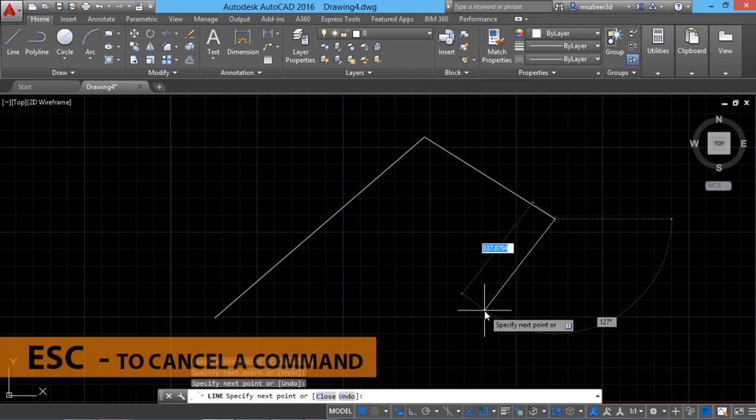Next, I would like to construct a circle. But this time, I'm not going to use the ribbon to choose the circle command, but instead, I'll type the first letter of the circle command, that is C. In AutoCAD, each and every command has got abbreviations, which we can memorize and input those abbreviations. So I'll type the letter C. When I type C, AutoCAD will list all the commands that start with the letter C. I can either give an enter to execute the circle command, or else I can choose any other command which starts with the letter C by picking against that command.

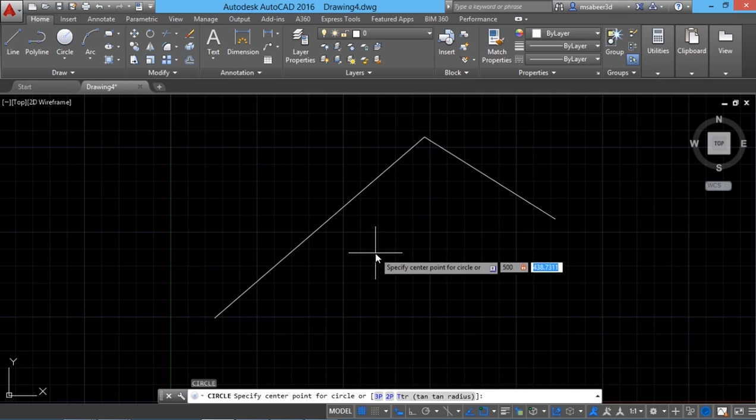So I'll give enter. It'll ask me for the center point, which is called the default prompt. So I'll just give a value which is say 500, 500. You can see that appearing at the cursor location, and press tab and again type 500 and give an enter. So the center is defined here at that coordinate location.

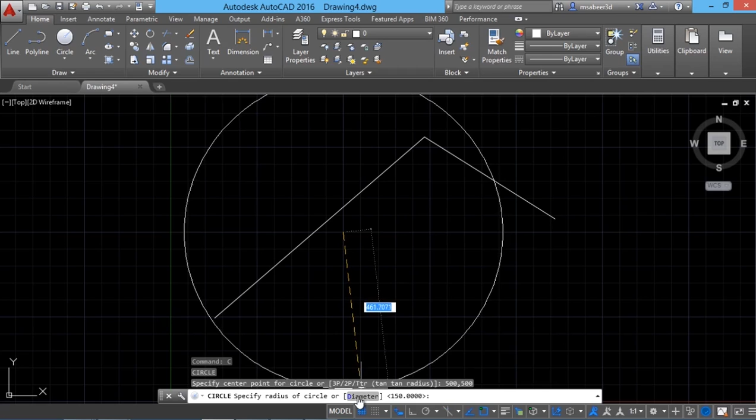Now it is asking for the radius. But instead of giving the radius, if I want to give the diameter, I can either click on the diameter option, or else I can type the letter which is given in blue color. Since here D is given in blue color, I can type that letter. But it's always easy to click against that option. Now it is asking for the diameter instead of radius. So I'll give the diameter of 600 units. So I'll give 600 and that will appear at the cursor location and give an enter.

So in AutoCAD, by default, each and every input which you give appears at the cursor location. That is because the dynamic input is on. If this option is not displayed here, you can go to the customization button. You can activate this option here. Once you disable the dynamic input, then the commands and the user inputs given will appear at the command line.

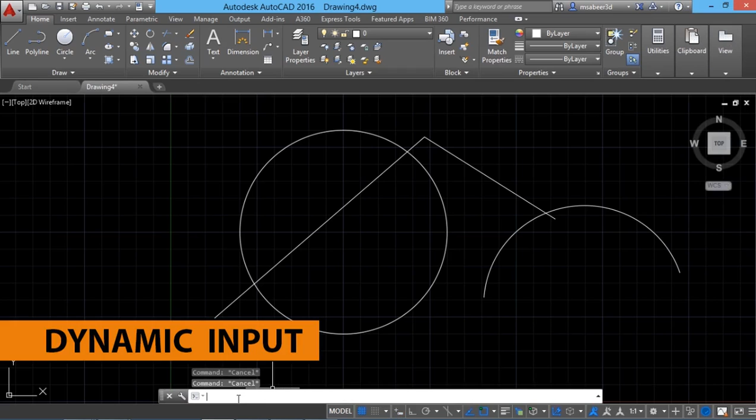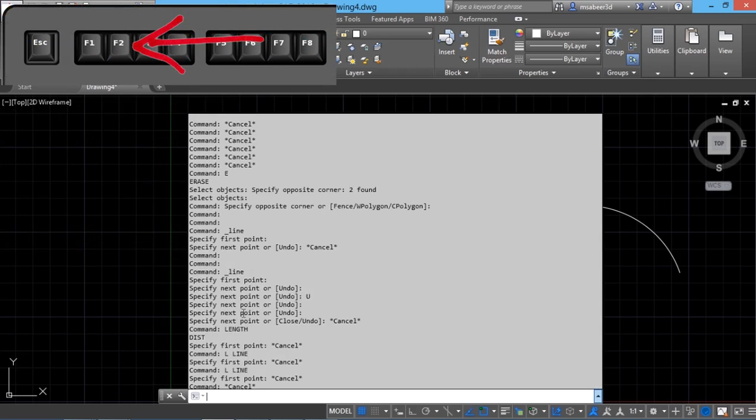By pressing the up arrow key, you can go backwards and see all the previously given commands, and by using the down arrow key, you can go forward, and by pressing the F2 function key, you will get all the previously given commands and the prompts. You can just scroll down and see all the details clearly. This is what you call the history. And if you want, you can just right click and copy this history and paste it onto any text editor for future reference. By pressing F2 again, you can close the history window.

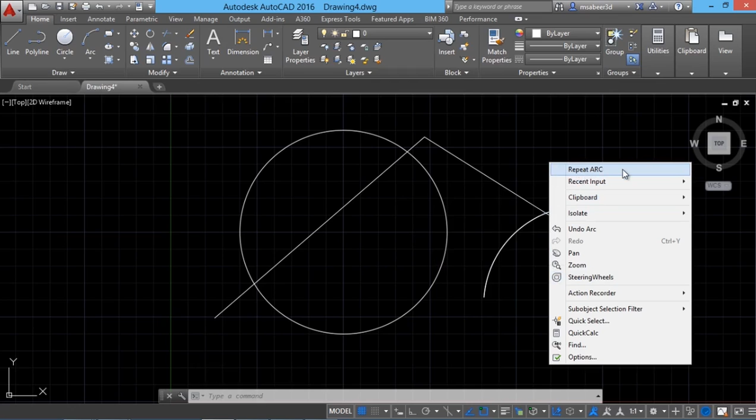AutoCAD memorizes the most recently given command, which can be repeated by giving an enter or by right clicking the mouse. I'll just right click the mouse to get the context sensitive menu. Here, the first option is repeat arc. Since arc being the most recently given command, by clicking on this repeat arc option, I can repeat the arc command. I'll just press escape to cancel this.

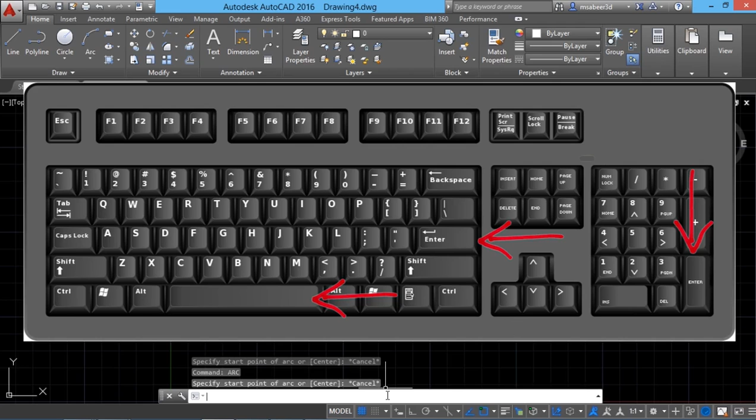Now, I can also repeat the most recently given command by pressing the enter key. As you know, a keyboard has two enter keys, but in AutoCAD, the enter can also be given by pressing the spacebar. That's the preferred method because the spacebar is a larger key compared to the normal enter keys of the keyboard. In AutoCAD, you can always undo a command, and undo will reverse the effect of the most recently given command.

For example, I'll draw a circle using the center radius method. Then I'll just give right click to repeat the circle command once more. Again right click, repeat circle, and I'll draw one more circle.

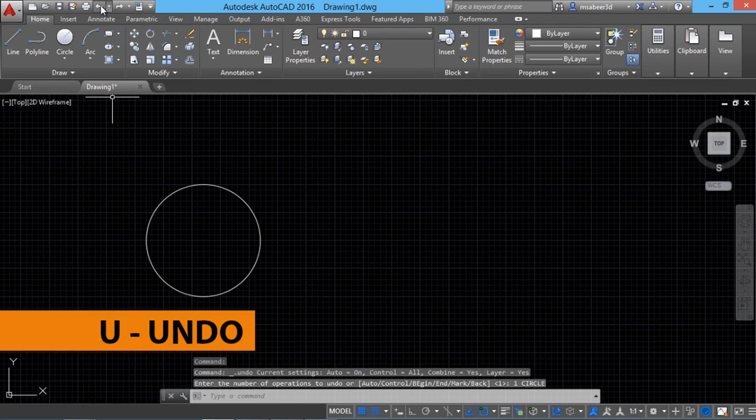Undo can be given either by typing U at the keyboard, or you can choose undo from the quick access toolbar. So I'll just give undo, so that circle is gone. One more undo, that circle is gone. With the third undo, you can remove the circle which you have drawn first.

Now I'm going to give redo, and redo will always undo the undo. Now I'll give redo, redo, redo. I've got it back. But the redo should be given immediately after the undo. Otherwise, it won't work. Next, I'll talk about units command.

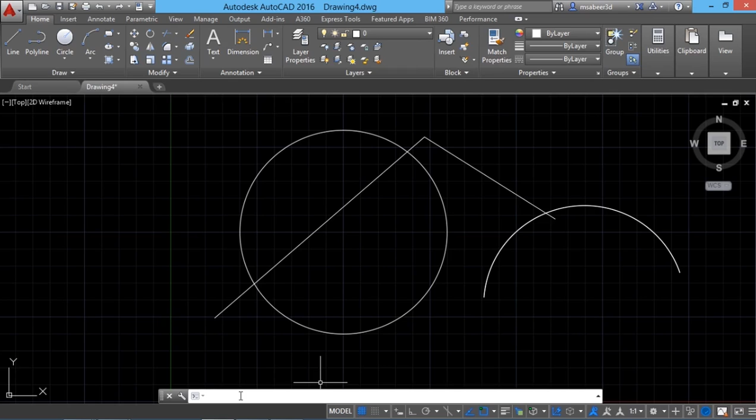Before we start any drawing, we have to set a proper unit. Basically, we create drawings in decimal and imperial units. In AutoCAD, when you work, we actually create the drawing in the true dimensions. Later on, while going for the plot, you can specify a proper scale to scale down the drawing or to scale up the drawing. So let's go to units command.

You can type the letters UN for units and you will see the drawing units dialog box appearing, or else you can go to the application button, drawing utilities, and here you can see the units. You will see the same dialog box. We should set the units for the linear as well as for the angular measurements.

For the linear measurement, we have architectural, decimal, engineering, fractional and scientific. In architectural units, you can draw in feet and inches. It is represented like a fraction, and feet are represented using single quotation and the inches are represented using double quotation. And if you do not specify any symbol along with the number you enter, your values will be treated as inches.

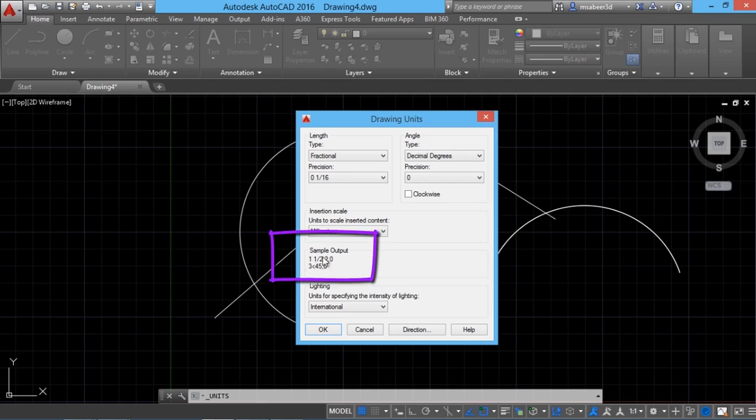And next is decimal. In decimal, the values which you enter will be represented in a decimal form. The next option is engineering. In engineering, you can have only inches. Fractional is basically used by cabinet makers, and here it is represented in inches but in a fractional form, as you can see in the sample output. And if you go for scientific, your units will be represented in the 10 to the power of e form. That means in the exponential form.

Let's select decimal because decimal is basically meant for metric and which is commonly used in India. Next, we have to set the number of decimal places. You can go up to 8 from 1 decimal. I'll set say 2 decimal places.

Next, we have an insertion scale option. In AutoCAD, you can insert an external block, which is nothing but an external object or an external drawing into the current drawing. Suppose that external drawing is drawn in different units. AutoCAD will scale that inserted drawing in such a way that its unit matches with the unit of the current drawing. Next, we can set the lighting units, which I'll set at international.

We have 3 options here, and we have the system of angular measurements, which is decimal degrees, degrees, minutes and seconds, gradians, radians, etc. And the commonly used system is decimal degrees. Here also you can go for the number of decimal places for the angular measurement. And by default, the angles are measured in the counterclockwise direction or anti-clockwise direction. But if you want the angles to be measured in the clockwise direction, you can just click over here.

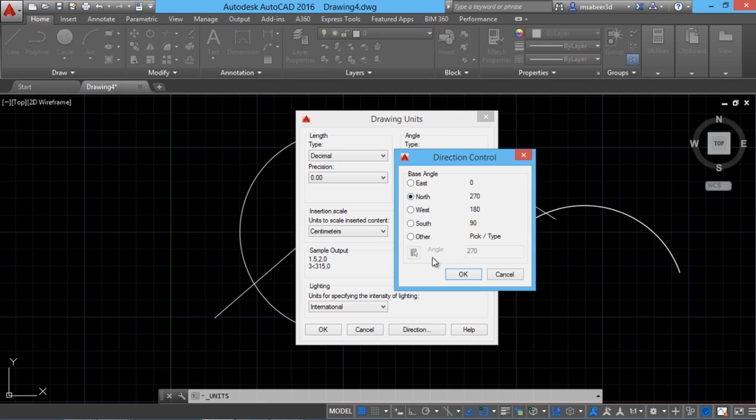Now just click on the direction button to set the base angle position. By default, the base angle is set at east. That means rightward, the positive x-axis direction. If you select north, your zero angle will be set at y-axis direction or in the north direction. You can choose any desired option. I'll set it at east, which is the default. Now you can just give OK to go out of the units command.

Next, I'll talk about the limits command. But before exploring the concept of limits, I would like to give you an overview of the coordinate setup in AutoCAD. This AutoCAD screen is assigned a Cartesian coordinate setup, the same coordinate setup which you have learned in coordinate geometry.

And this particular icon indicates the directions of x-axis and y-axis. But there is also a z-axis which is coming towards us. If you want to see the direction of the z-axis, you can just hold on the shift key and press the scroll button of the mouse. You can tilt the coordinate setup and you can see the z-axis. Okay, I'll just give undo to cancel this operation.

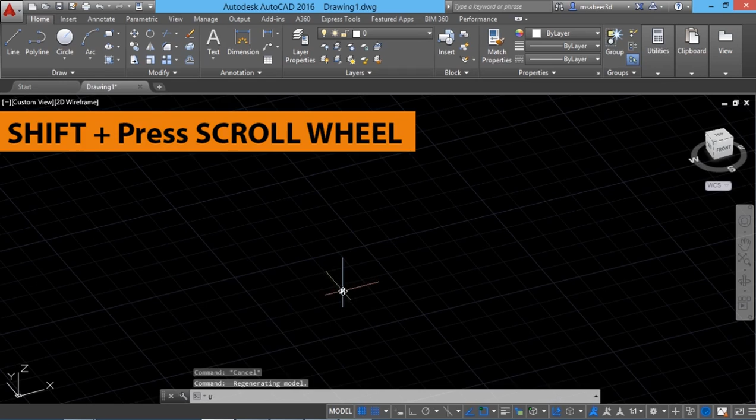There are grid lines on the screen running in the horizontal and vertical directions, just as you see in a graph paper. And the distance between each grid line is set at 10 units by default in both directions. If you want to change the grid spacing, just right click and you can go to grid settings. Here you can change the spacing from 10 to any other value. And if you want, you can suppress the display of grid by pressing here, and you can press once more to get the grids back. Or you can use the F7 function key to control the display of grids.

Similarly, there is a snap option available. When the snap mode is on, the cursor jumps from one grid point to another. For example, if I try to draw a line, you can see that the cursor jumps from one grid point to another. And this feature can be used to precisely locate points.

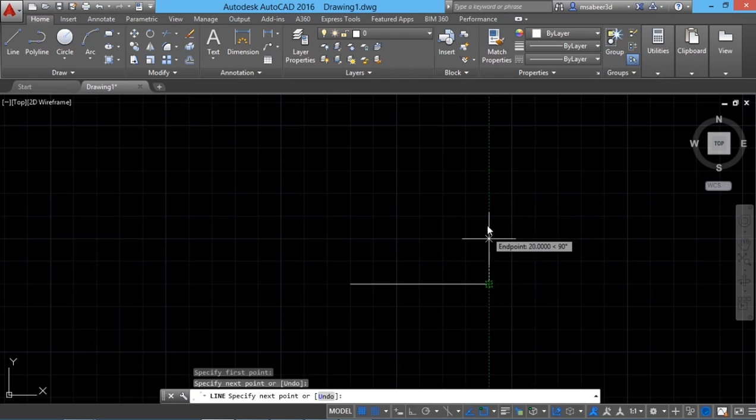Presently, snap and grid spacing is given the same value. But if you want, you can change the snap spacing. For that, you have to right click on the snap button in the status bar toggles, then go to snap settings, and here you can give a new value if you want. Snap mode can be enabled and disabled by pressing the F9 function key. I hope you have got an idea about what snap and grid is all about in AutoCAD.

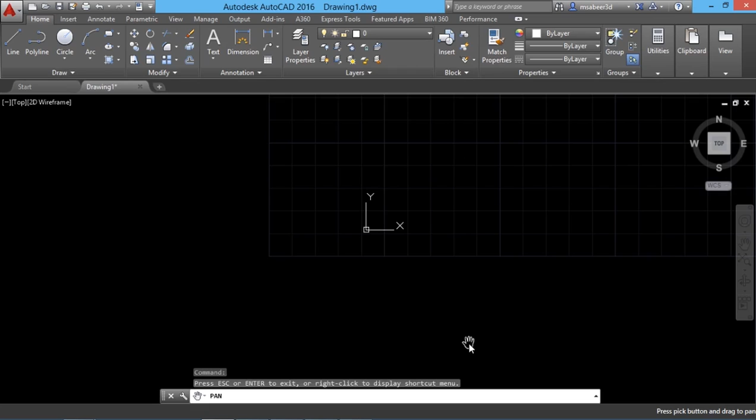Now let's come back to the coordinate setup. Over here, we can see the first quadrant. Now I'm going to pan my screen. When I pan my screen, you can see that the origin is getting shifted. Now you can see the first quadrant here, second quadrant here, third and the fourth quadrant is also visible. So likewise, you can bring in all the 4 quadrants within the screen if required. Now I'll right click and exit.

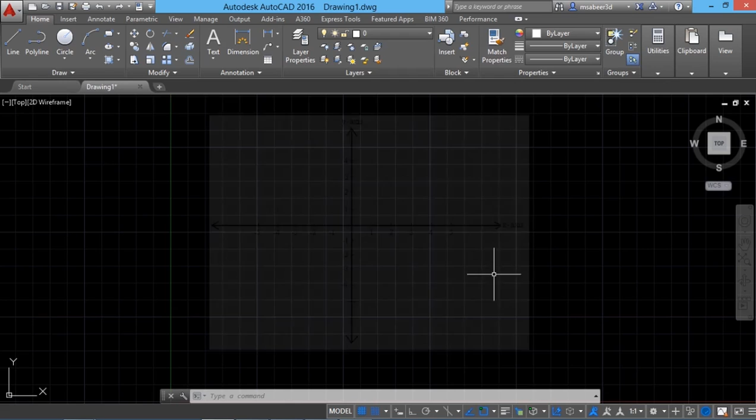You know that AutoCAD screen is infinite in nature. It's just like our universe, and it starts from minus infinity and goes towards plus infinity in all directions. But as a user, you don't need the entire screen to work. Instead, you need just a rectangular area from the screen. For that, you have to set a limit to define this area. So setting limit is defined as a process of defining a rectangular area from an infinite screen to perform drafting or modeling.

A rectangle can be defined conventionally by inputting length and width. Or you can define it by inputting 4 corner points. But do we actually give 4 corner points? No. In limits command, you actually define the lower left as well as the upper right corner. So how will you define the other two corners? The coordinates of the other two corners are calculated from the coordinates of the lower left as well as from the upper right corner. The coordinates of the upper left corner is obtained by extracting the x coordinate from the lower left and y coordinate from the upper right.

Since the lower left and the upper left are along the same vertical line, the x coordinate of the lower left and the x coordinate of the upper left will be the same. Similarly, the coordinate of the lower right is obtained by extracting the x coordinate from the upper right and y coordinate from the lower left. So this is how all the coordinates of a rectangle is obtained.

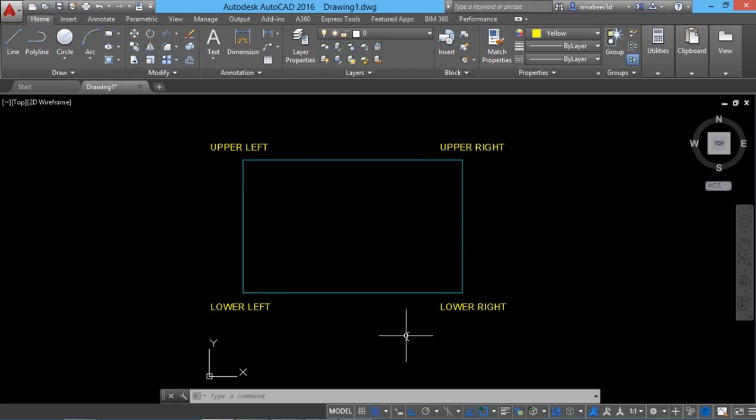When you set the limits, AutoCAD will activate that area for the user so that the user can perform two-dimensional drafting or three-dimensional modeling in it. Now, after you set the limits, we have to zoom that area so that it will fill up the entire screen. So this is a very important step to be followed. So I'll go to zoom command. So type Z for zoom and you select the option all.

When you click on the all option, the area which you have defined in the limits will fill up the entire screen. From this illustration, it is clear that the limit which you have defined will be center justified with respect to the screen. But you can always draw outside the limits if you want.

If you do not give the zoom command's all option immediately after setting the limits, what happens is your limit may sometimes remain at a corner of the screen. Sometimes it may be lying outside the screen. In both the cases, the moment you give zoom all, it will fill up the entire screen and it will remain center justified within the screen.

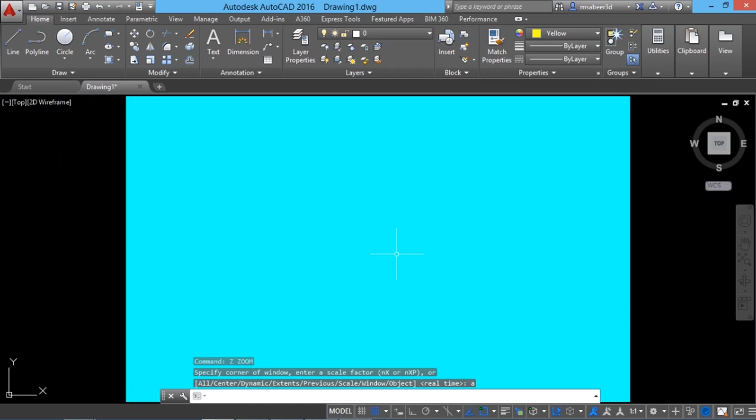Now let's see some live examples of two-dimensional drafting so that you will get a better understanding on setting the limits. We will set a proper limit to draw this figure. When you go through the dimensions, you can see that there are no negative values in this figure. So you can keep the lower left corner at the origin at 0, 0. And how will you define the upper right corner?

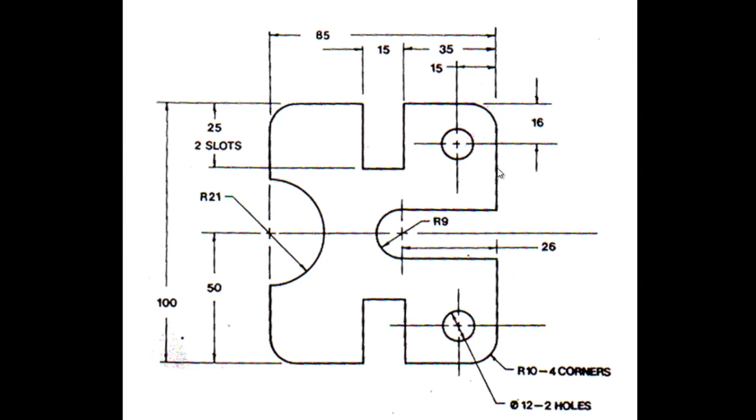For that, you have to go through the figure and locate the maximum dimension. The maximum dimension is 100 units in this. So you have to define the upper right corner in such a way that its value is above the maximum dimension to be plotted. Since the maximum dimension is 100, you can give a value something like 125 or 150. So we will give the limits command to do this.

I'll give limits. When I'm asked to give the lower left corner, I'll give 0, 0. And when I'm asked to give the upper right corner, I'll give 125, 125. Now I should give a zoom all. I'll give Z for zoom and A for all, or else you can just click on the all option. Now this screen can properly accommodate that drawing.

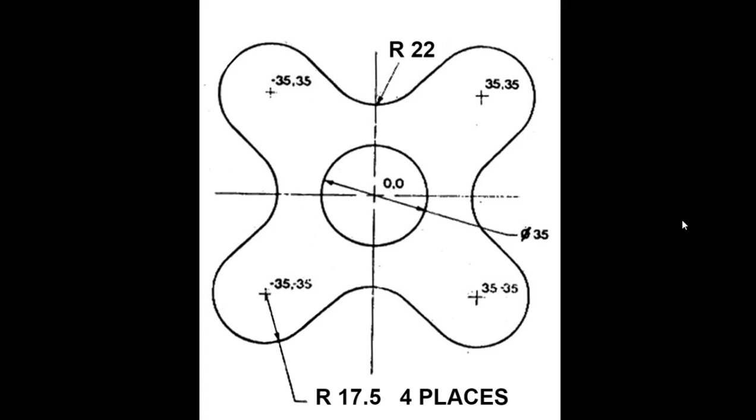So likewise, by setting the lower left at minus and upper right at plus, you could bring all the 4 quadrants within the screen. So that is how the limit for this particular figure is set. So let's give the limits command in AutoCAD to get these limits on the screen. I'll give limits, and the lower left, when I'm asked, I'll give -60, -60. And the upper right, I'll give 60, 60, followed by Z for zoom, and I'll type the letter A, or I'll click on all to get the limits on the screen.

Obviously, all the 4 quadrants must be in the screen, but the origin still remains here. If you want to see the UCS icon exactly at the actual origin point, you can give a command called UCS icon, and you can select the origin option. Just click on the origin. Now the icon will sit exactly at the origin point. Now from this, it's clear that you have brought all the 4 quadrants within the screen.

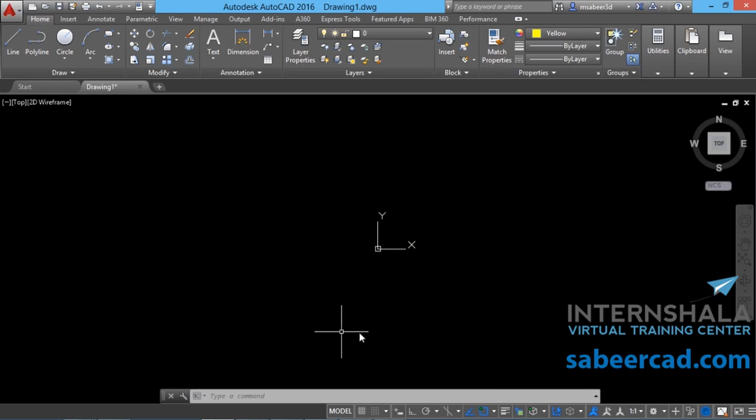So from these 2 examples, I'm sure that you must have got an idea about the concept as well as the criteria to set the limits. Okay, so that's all about this tutorial. In the next tutorial, we will see how to create basic objects such as points, lines, circles, etc.